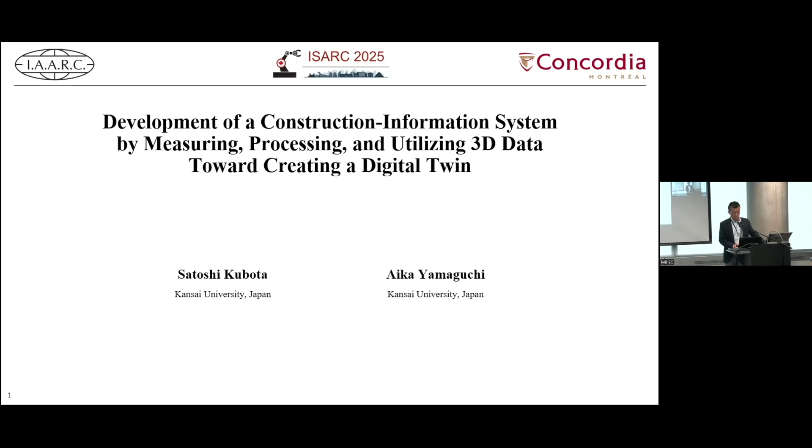Background: construction sites are diverse, and it can be difficult to use a one-size-fits-all method for acquiring three-dimensional data and point cloud data to understand site conditions. Digital twins, or cyber physical services, are being promoted to collect data related to infrastructure and urban activities and visualize them in 3D space.

In the construction field, there have been few initiatives to collect and manage information on construction sites with the aim of creating digital twins that reproduce information from construction sites in cyberspace. It remains unclear which types of data can be acquired on construction sites.

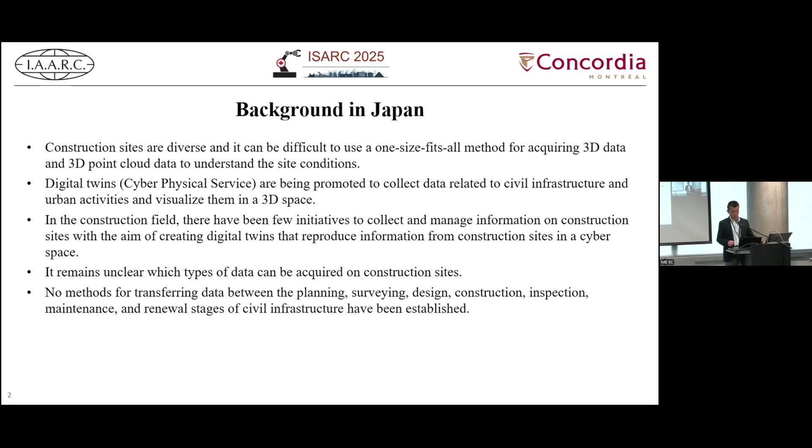No method for transferring data between the planning, surveying, design, construction, inspection, maintenance, and renewal stages of infrastructure has been established. In Japan, i-Construction initiatives are promoted by the Japanese government.

i-Construction is using ICT for all construction projects, with increased acquisition and use of 3D data and point cloud data. For example, ICT earthwork results in about a 30% reduction in work time.

However, there are several problems for promoting i-Construction, such as high-cost equipment and measuring instruments, and it is difficult to use such instruments for small or medium-sized construction sites.

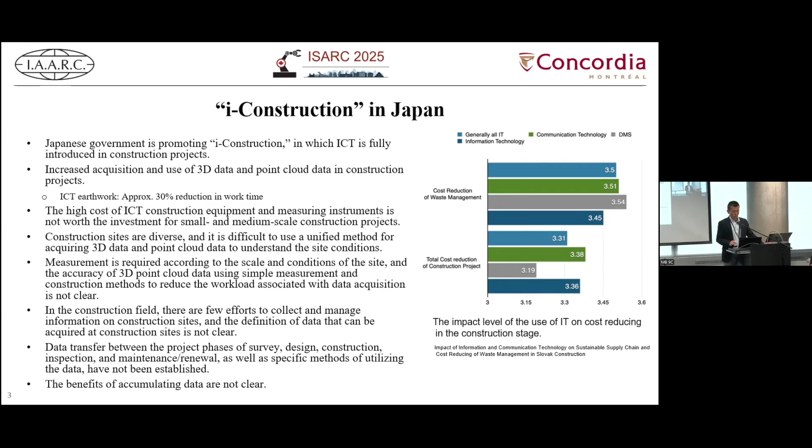In this study, a construction information system is proposed in which 3D data and point cloud data are distributed and utilized at small and medium-sized construction sites. A construction site digital twin based on 3D point cloud data is considered, and use cases for utilized construction information are discussed.

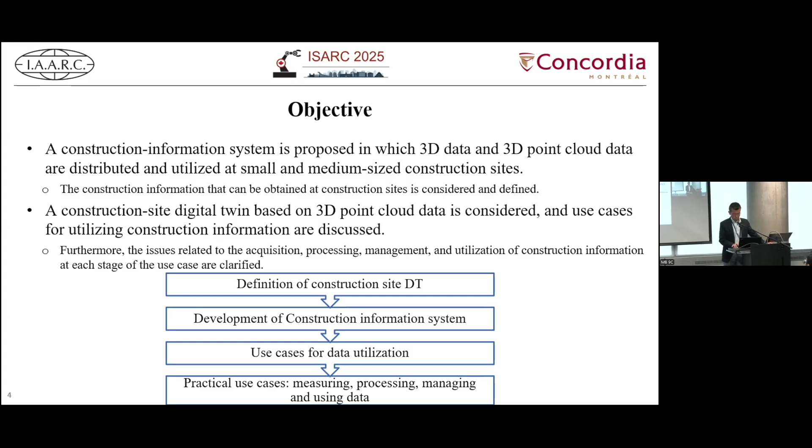We propose a construction site digital twin for processing the data collected at the construction site and visualizing the construction site in cyberspace.

The status of construction work in physical space: the data is acquired and collected using a terrestrial laser scanner and camera photogrammetry.

And the behavior of equipment and workers is collected using wearable devices and cameras.

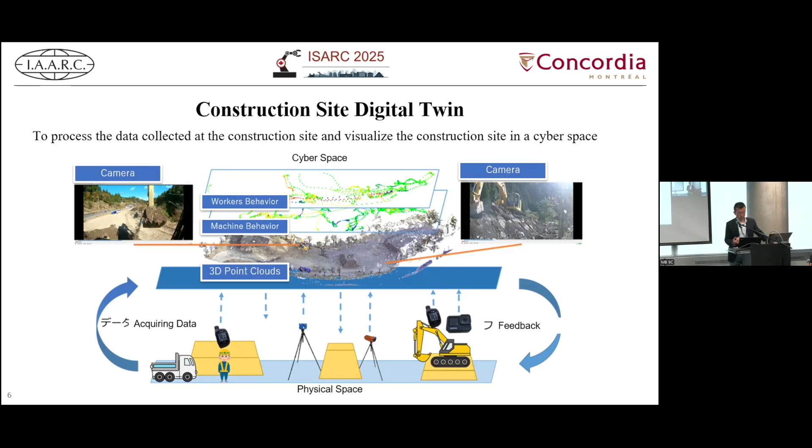The results of these processes are reproduced in cyberspace. The analysis results in cyberspace are fed back to physical space.

This slide shows the concept of the construction information system. The construction site digital twin collects and accumulates data in accordance with data definitions. The system consists of measuring, processing, management, and utilization layers.

In the measurement of construction information, terrestrial laser scanner, UAVs, and camera photogrammetry are used to measure the shape and changes of structure at a construction site. And wearable devices are used to measure the behavior of construction equipment and workers.

In processing, 3D data as a foundation of this system is constructed from the measurement data. In management, data is classified and defined by data characteristics based on the method of data collection and the frequency of data acquisition. In utilization, the analysis of such data can be fed back to the site to review the construction work and inspect the structure.

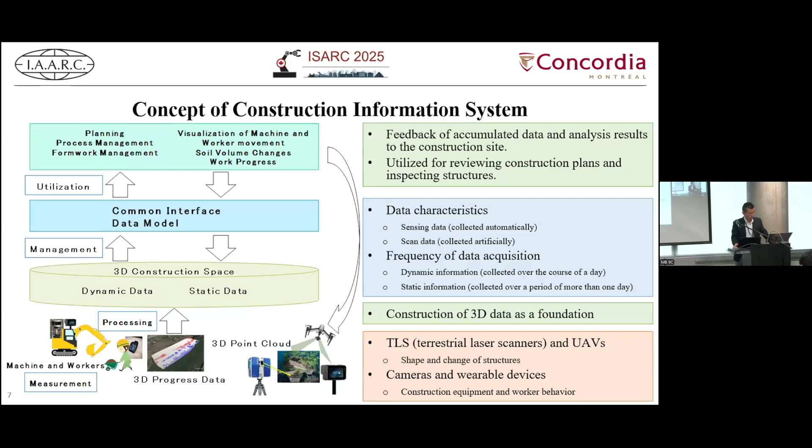In the management of the construction information system, data modeling of information classified according to data characteristics and frequency of data acquisition was performed, and a class diagram using unified modeling language was created.

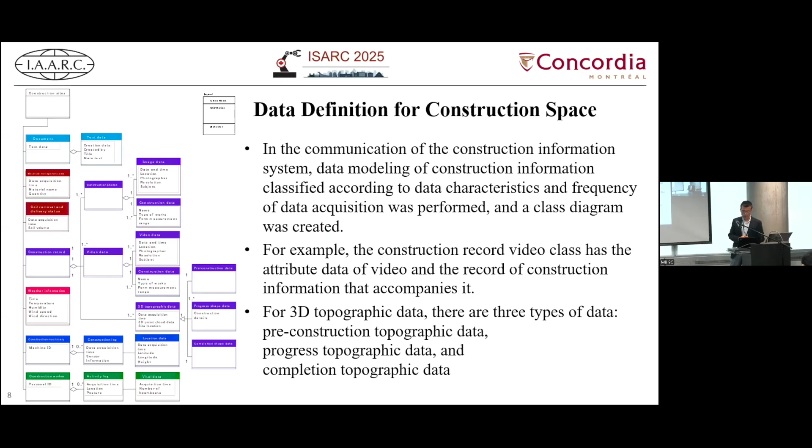We propose three use cases for using construction site information: progress management, quality management, and safety management. In progress management, the differences of progress in daily work are compared.

For quality management, the progress is recorded and the site condition and arbitrary data can be reproduced. In safety management, it is used to realize monitoring of the worker's physical condition using wearable devices.

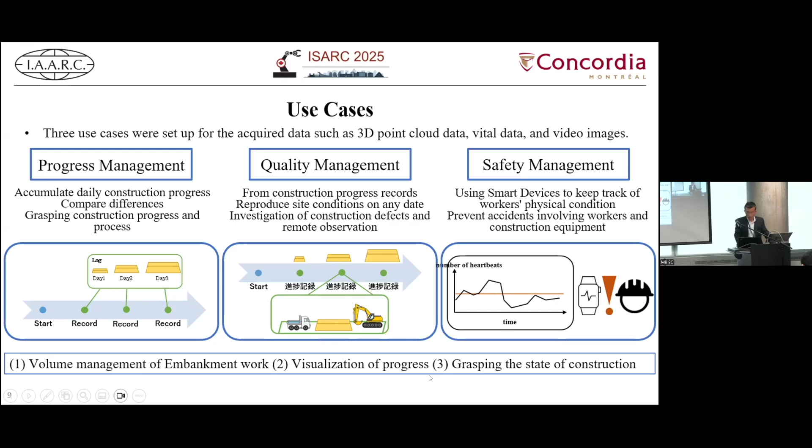In this study, we will introduce the use of data in volume management, visualization of progress, and grasping the state of construction.

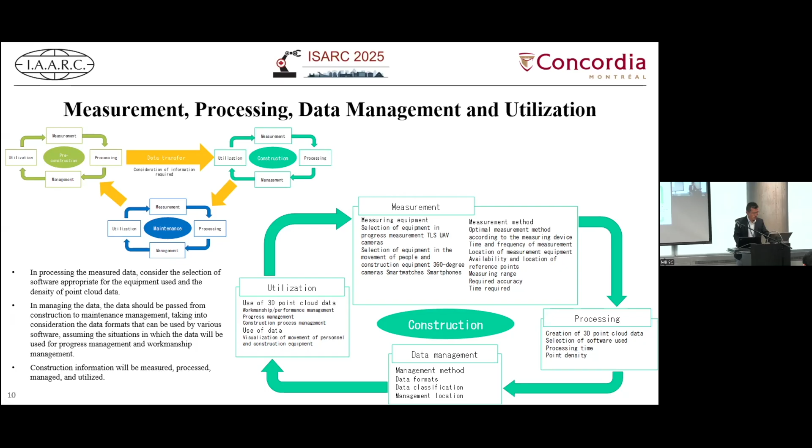This slide is a summary of consideration for each stage of the cycle.

The experiment was conducted for utilizing construction site information for creating a digital twin. At the site, UAV, camera, wearable devices, and terrestrial laser scanner are used.

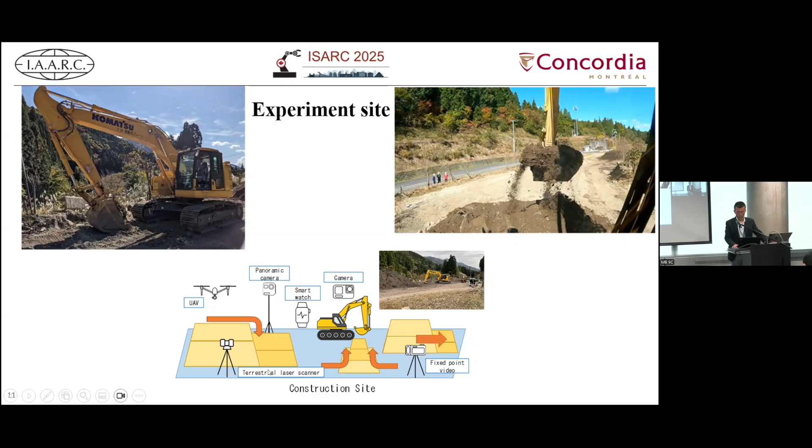Here is a list of the acquired data, such as point cloud data, video data, and operator's position. These data are used for the digital twin of the construction information system.

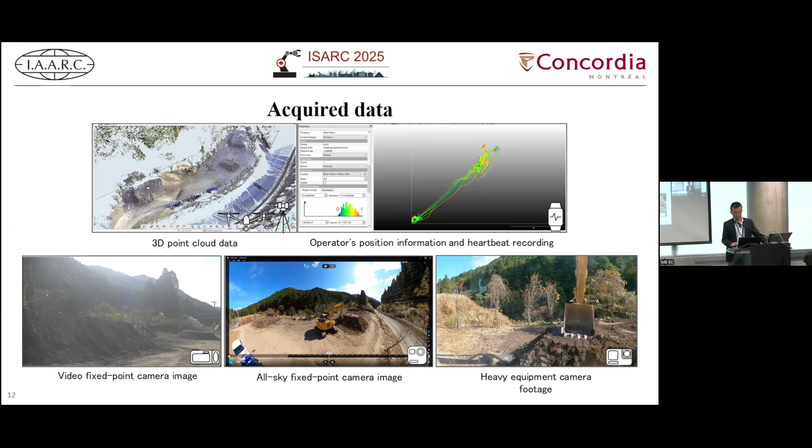In order to grasp the daily progress, it is necessary to calculate the daily work volume. We recorded...

UAV camera data, and camera data is translated to 3D point cloud data using SFM and MVS technology. And these data are compared and visualized in a heat map.

This table shows the volume management of embankment work.

For this study, the accuracy requirement is within 200 millimeters, using the TLS point cloud data as the most accurate value.

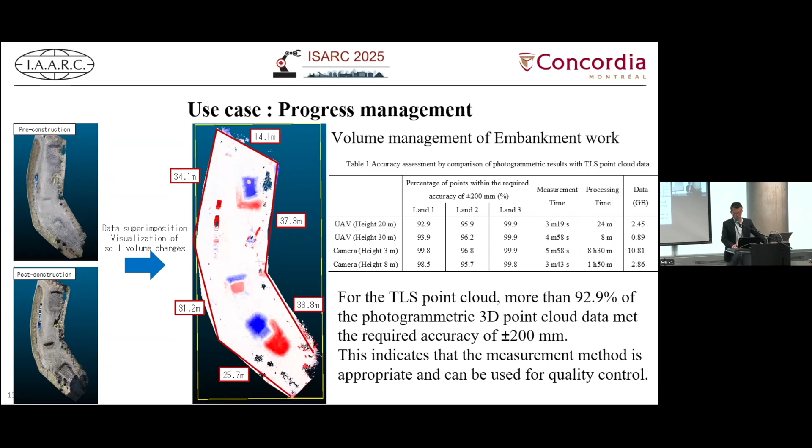This is the accuracy assessment by comparison of the photogrammetry result with TLS point cloud data. More than about 92.9% of the photogrammetric point cloud data met the required accuracy of 200 millimeters. This indicates that the measurement method is appropriate and can be used for quality control.

This is the construction information system we proposed. The system is used for understanding the construction status by tracking back through the time period.

For example, in embankment construction, pre-construction and progress topography data, camera images, and point cloud data are visualized. Camera images were displayed on the topographical data by setting the shooting position and direction.

Using this system, there are merits for the construction site, such as reproduction of site conditions at that time by displaying data in different formats on the same base, utilization as a record of detailed construction procedures from multiple viewpoints, and the system enables centralized management and 4D management for the future.

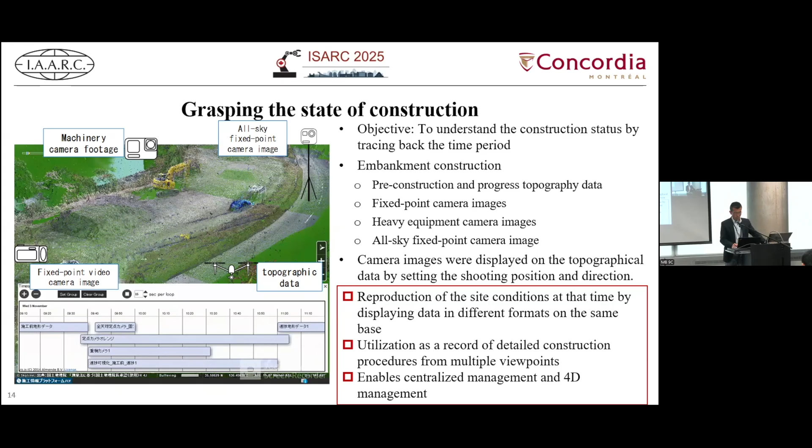Conclusions: we have developed a construction information system and verified the flow of measurement, processing, management, and utilization of information in order to promote the distribution and utilization of 3D data and point cloud data at small and medium-sized construction sites, realizing advanced construction management and the digital twin of the sites.

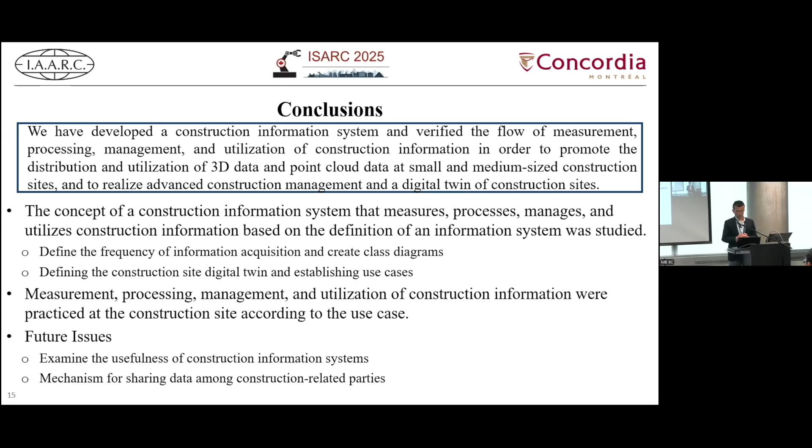Future works: we will examine the usefulness of construction information systems and propose a mechanism for sharing data among construction participants. That's all. Thank you.